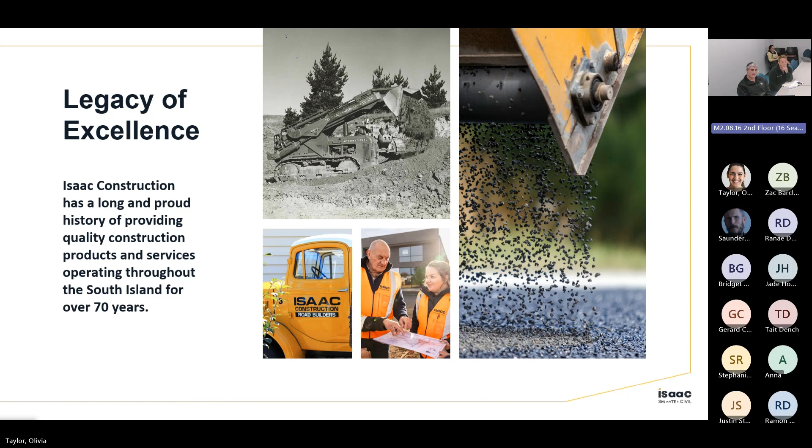The Isaac Trust model, our ownership model, exists really for three main pillars - the goals and deliverables for the trust. So we have a wildlife breeding park.

Essentially, the land that we've quarried out since 1950 we have remediated into natural lakes, lagoons, and a breeding centre, which is closed to the public. We have private relationships with the Department of Conservation to breed endangered species of bird, which we do down in our rehabilitated quarry. We employ wildlife keepers, conservationists, landscapers, and maintenance people out of the trust to maintain that area and work with the Department of Conservation to breed these endangered birds.

We work with them to release the birds back into the wild, and a number of them are only around today in existence because of the influence and interaction that the Isaac Trust has had over the last 25 to 30 years. That's a really important arm of what the Isaac Conservation Trust does. The other two arms are: we invest in education, so environmental and sustainability education, in the shape of scholarships - master's level scholarships with Canterbury University, Lincoln University, and Otago University, which we fund every year for students looking to further their education at master's level.

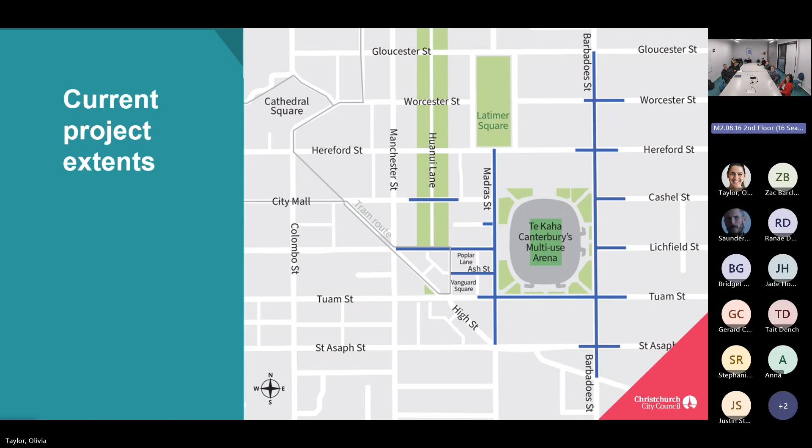We've also got a couple of other little spots, Ash Street and a little bit on Cashel Street. So we'll be replacing the wastewater and water supply in all of those areas, not both in every area, but generally speaking in most of those areas.

There's two main reasons why we're doing the wastewater and water supply upgrade. The first is that a lot of the pipes are well over 100 years old, some up to 140 years old. They're at the end of their life and need to be replaced.

Some of the wastewater pipes were installed around the 1880s, and we've got some water supply pipes installed in the early 1900s, around 1904. So we've got some very old infrastructure which is going to get replaced.

The second main reason we're replacing this stuff at the moment is we need to upgrade the capacity for the new stadium going in. So we need bigger pipes to take more wastewater away, and bigger water supply pipes to supply more fresh water.

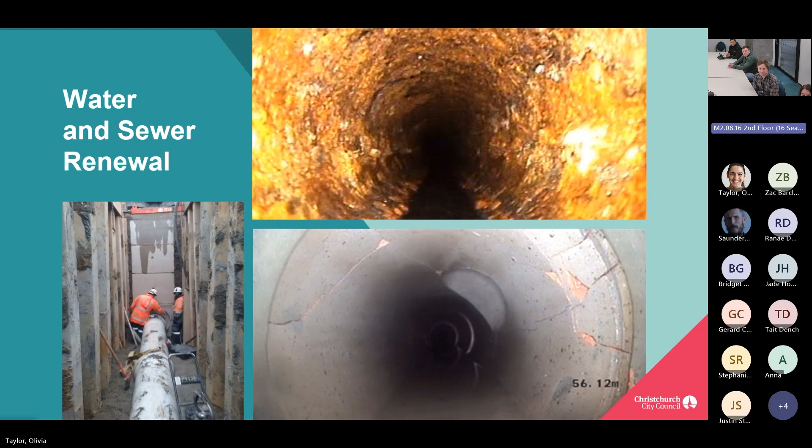Just to give everybody a bit of an update, when we went for consultation on this project to the community, there were two elements: the water and wastewater side of things that needs to be done, and the transport upgrade works that we heavily consulted on.

At this stage, we are not proceeding with those transport works until we get a funding decision from NZTA. When the new government came in, they put a hold on approving our funding application, which goes towards subsidising the works we do for transport.

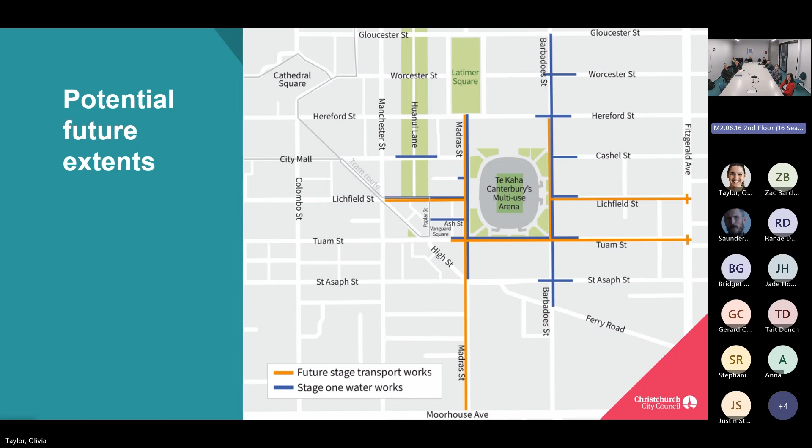Next slide. Oh, it's Dan. Okay, thank you. I'm Dan Lucas, I'm the project manager for the works.

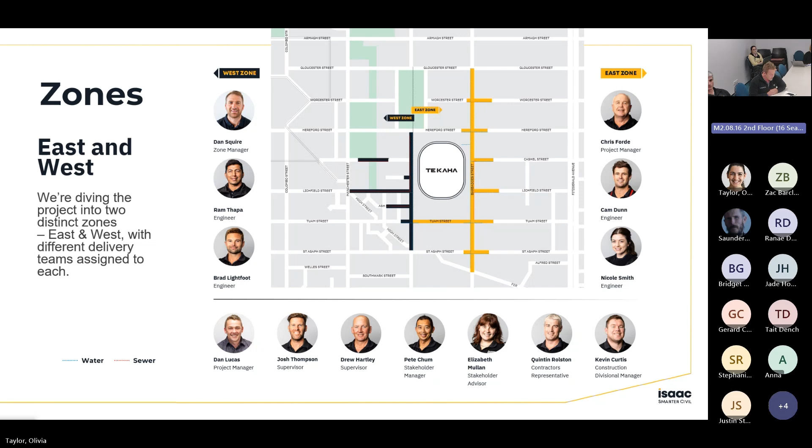Just next slide, please. So stakeholder liaison is one of the key aspects to our delivery. Our stakeholder advisors are there to really be the voice for the public during our project planning. I'll admit that we often get a bit of tunnel vision in terms of building the works, and having those individuals there that are entirely accountable for the stakeholders and having them involved in our planning meetings is really important to us. We do really encourage the public, stakeholders to be speaking to these people and tell us what's important to you so that we can incorporate it into our planning.

We are a horizontal construction project, so what that brings is more flexibility than you may see in a vertical construction project. Obviously if you're building a building, you need to start at the bottom and build to the top. Because we're building horizontally, we do actually have a lot more flexibility. So once we understand the constraints that stakeholders have, we can work to accommodating that as much as possible. But again, we just really, really encourage you to speak up to us and tell us what's important.

We do have to balance the needs of stakeholders versus the speed of the program. In all honesty, when we are there and on the road, as you'll know, we bring disruption. So for us, it's important to get complete as fast as possible, and we do need to balance that disruption versus overall speed.

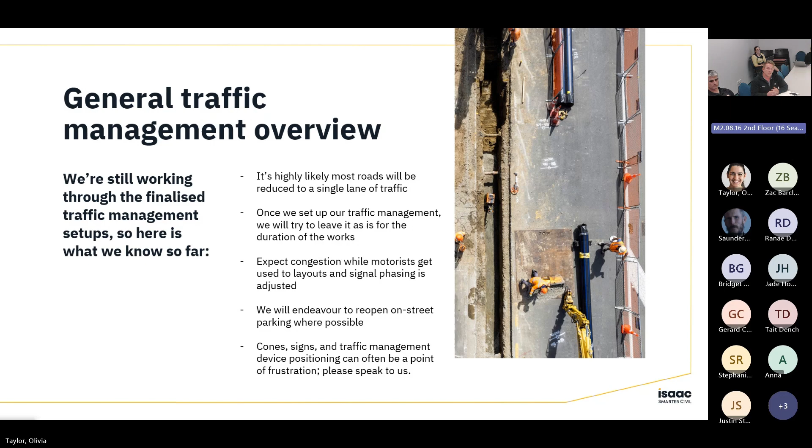We like to work with the flow of traffic, so in each of these areas we will start at the north end and head south - that is heading with the direction of traffic. One crew starting at Gloucester, one at Lichfield, and one at Tuam, working on a mixture of installing water pipes and wastewater pipes.

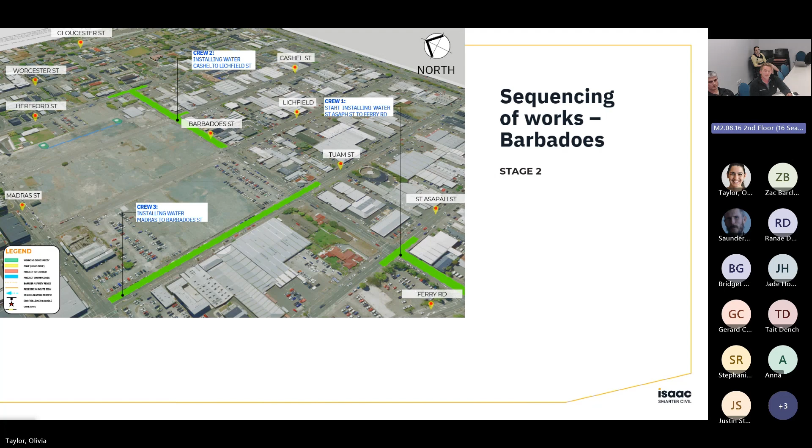Obviously, as we start to move into intersections, we start to disrupt more roads, more side roads. So that's where we endeavour to really do the setup that's within the intersection only when we absolutely need to, and then pull it out as soon as we've finished that work.

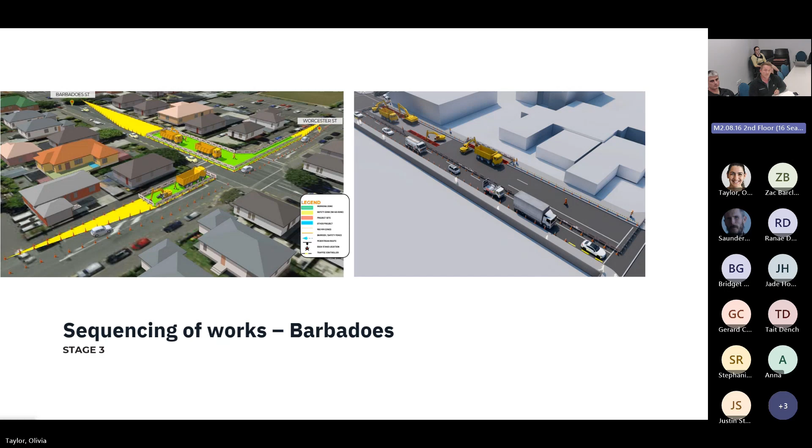As we progress into the Madras Street work, which will be undertaken simultaneously, a slightly different approach over on Madras Street. That's because we have less side roads that the pipes need to go back up into to tie in.

What we've worked out is if we can put the pipes in that need to cross the road first, which is what this layout is showing, then as we progress into the next stage, we can set this same layout out for essentially the remainder of the duration.

This shows us setting up on the stadium side, or the east side, of Madras Street, and working with multiple crews down Madras Street in a similar fashion to Barbadoes, but again working with the flow of traffic, we'll work from the southern end heading north.

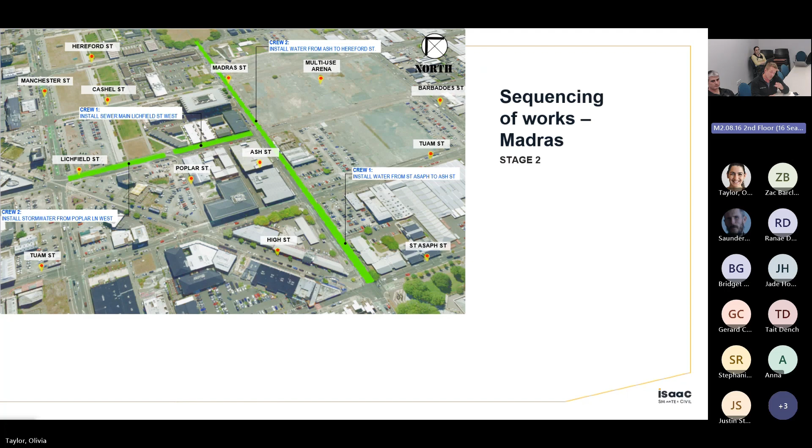And then there is the introduction of Lichfield Street, which has a one-way system as well. So this is your typical layout of Madras Street. You can see a small gap there and some blue writing that says retained access. That's how we work through maintaining access open to businesses. As that crew works up, they'll work halfway over the entranceway and then flip it, similar to what you saw with the intersection picture earlier.

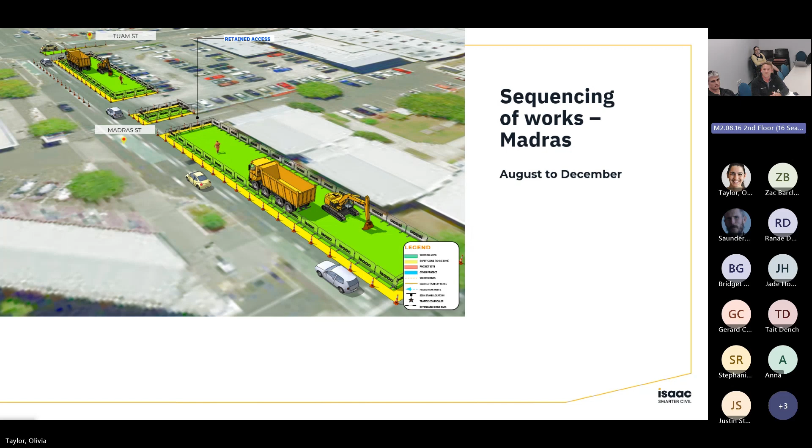As we progress to the next slide, this is an example of how we intend on laying out Lichfield Street. It's particularly complex on Lichfield Street to maintain the tram flow. The tram flows from west to east, and there's not a lot of room to fit a lane of traffic and a tram. That's really what dictates the direction of flow we need to maintain for that one-way system. We're maintaining that loop around into Poplar, and our pipe work, interestingly, will actually be tunnelling under the tram lines.

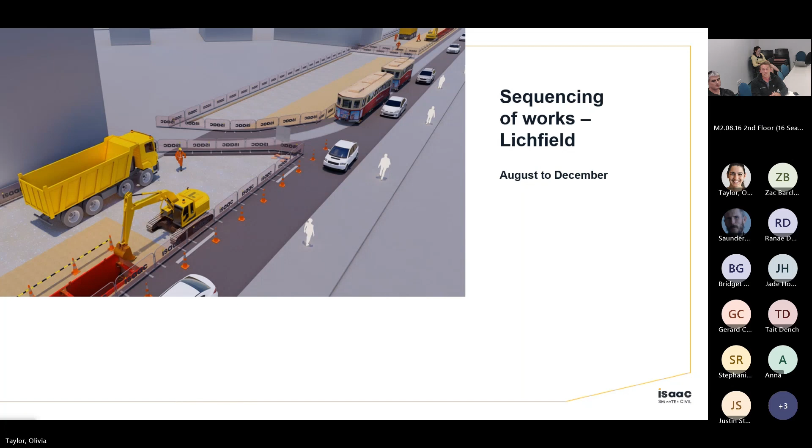Finally, I mentioned there's a sewer upgrade to happen in both Cashel and Ash Street. Obviously, these streets are particularly constrained in terms of width and space available, so these are the areas that will require road closures. For Ash Street, we work up to the crossroad and then flip it over, so it does maintain, I guess, three-quarters of the area open. And Cashel Street, we intend on closing from Manchester Street just to the extent of the sewer. That will still maintain access into Cashel Street from Madras Street.

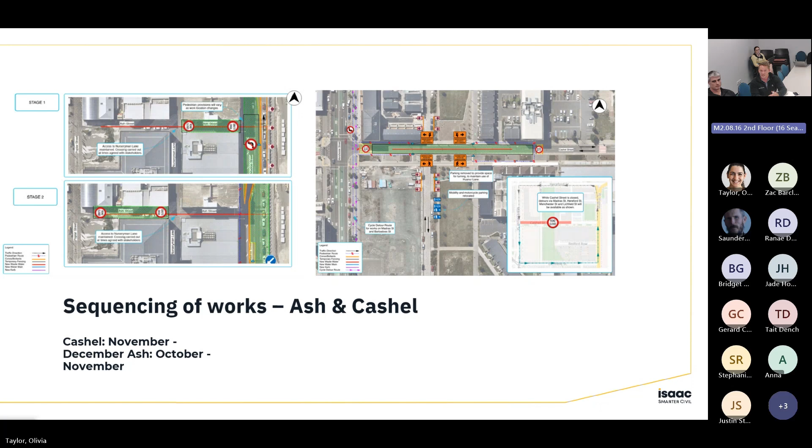So the key takeaway really is, look, we can't change the work that is required, but we absolutely have flexibility in how we will deliver it. We can build aspects into our planning, but again, we just need to know what is important to you and how we can adapt for that.

As Jenny talked about, as more stages are hopefully approved, we will need to react quickly. So our advisors will be back out to keep you informed and again explore those things that are important.

Again, finally, please, above all else, we just want to hear from you. So if there's anything, please don't hesitate to reach out.

I'm not sure whether we've actually received any questions, but we're now opening the floor to any questions that may come. Which we have nothing yet. So whether there's anything now or whether something comes to mind later, we're more than happy to come out and see you individually to talk through any impacts that you may be facing or concerns you have. There's plenty of different email addresses or phone numbers to get hold of us, so please don't hesitate to reach out.